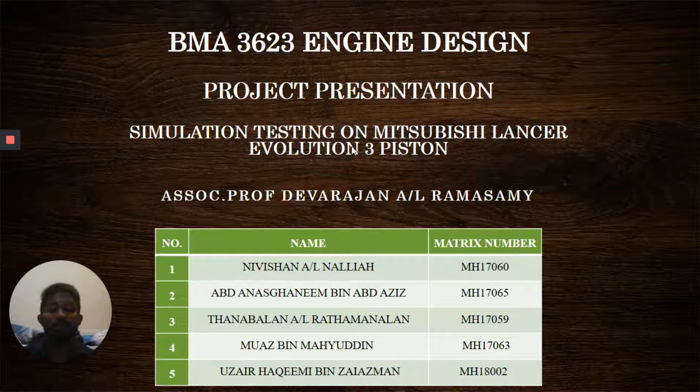Today I will explain to you all about the introduction of our project. Our project is a simulation testing on Mitsubishi Lancer Evolution 3 piston. In the introduction there are four subtopics: the first is the model of vehicle, Mitsubishi Lancer Evolution 3, or more commonly known as Evo 3; next is the engine type, 4G63T; next is the introduction about the piston; and lastly the objective of our project.

Now let us discuss the first subtopic, the model of the vehicle, Mitsubishi Lancer Evolution 3, or Evo 3. Evo 3 production was from 1995 to 1996. This car can produce around 201 kilowatts of power at 6,250 rpm and around 309 Newton meters of torque at 3,000 rpm. This car is all-wheel drive, powered by a turbocharged engine, with power transferred to the wheels using a 5-speed manual transmission. The maximum speed is 180 km per hour.

Now I will explain some detailed specifications about the chassis. Body type is a 4 or 5-seater sedan saloon with 4 doors. Wheelbase of the vehicle is 2510 mm. Tread front is 1465 mm, tread rear is 1470 mm.

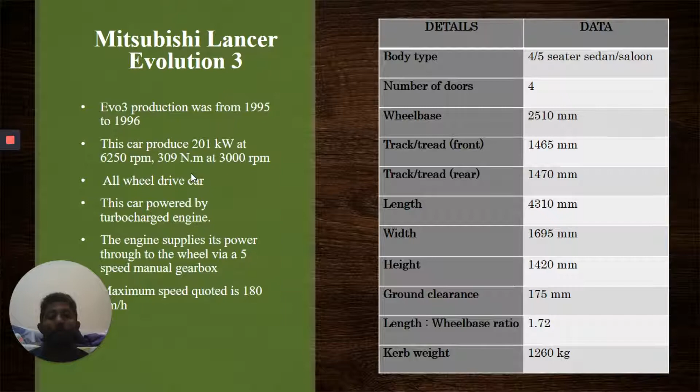Now let us move to the second subtopic, the engine type, 4G63T, first introduced in the 1980 Lancer EX2000 turbo car. This engine was manufactured with single overhead cam and dual overhead cam versions, but Evo 3 used a dual overhead cam. It was also manufactured with a naturally aspirated or turbocharging system, but Evo 3 used a turbocharging system. This engine was used in the Evolution generations from generation 1 to generation 9, and has been proven for its reliability and extraordinary power output.

Now I will explain some engine specifications. Bore of the engine is 85 mm, stroke is 88 mm, rod length is 150 mm, and piston pin size is 22 mm.

Total combustion chamber volume is 62.8 cc. Each cylinder volume is 499.4 cc. Compression ratio of the engine is 8.5:1. Crankshaft radius is 44 mm. The connecting rod type is I-beam.

The engine classification is inline, type of fuel is gasoline, number of strokes is 4-stroke engine, type of ignition is spark plug ignition, number of pistons is 4, motion of the piston is reciprocating, and the breathing type is forced induction.

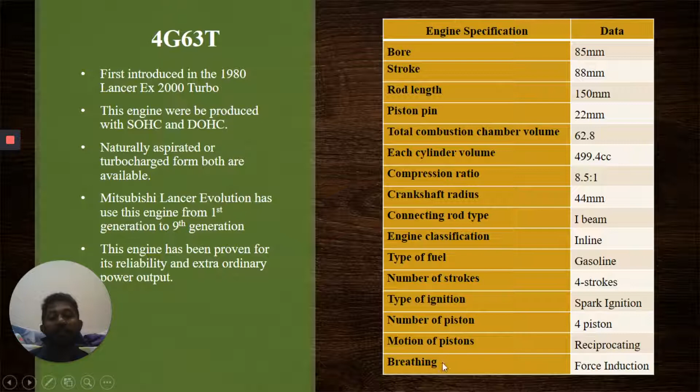Now let us discuss the third subtopic, the introduction about the piston. The piston is commonly a part used to transfer combustion energy to the connecting rod. The piston is commonly made of cast aluminum alloy because, as we know, aluminum alloy is a material with high thermal resistance and is very durable. Next is the piston features.

In a piston there is a piston head, piston pin bore, piston pin, skirt, ring groove, ring land, and lastly the piston ring. This is what we call the piston head, this is the piston pin hole, and this area is called the piston skirt. This is the oil ring, and these two grooves are used for the compression rings. This small hole is an oil drain hole to control the lubrication for the piston.

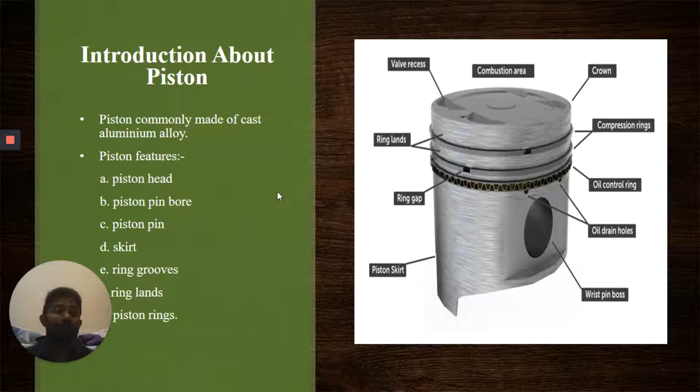Now let us discuss the last subtopic of the introduction, the objective. The objective of our project is to study the characteristics of the Evo piston, and next is to study the basic parameters to design a piston, because as we know, several parameters must be considered when designing a piston.

About for our group. So the introduction is: in designing any component, there are two major principles in designing, that is optimization of the product and the safety of the product.

So the primary objective in the design of this piston is to convert, not this piston but any piston, is to convert from chemical energy to useful mechanical energy. And secondly, it is to dissipate heat from the combustion chamber. So by having these two objectives, we have to carefully select our material so that it will dissipate heat better and also can withstand the operating pressure of the engine.

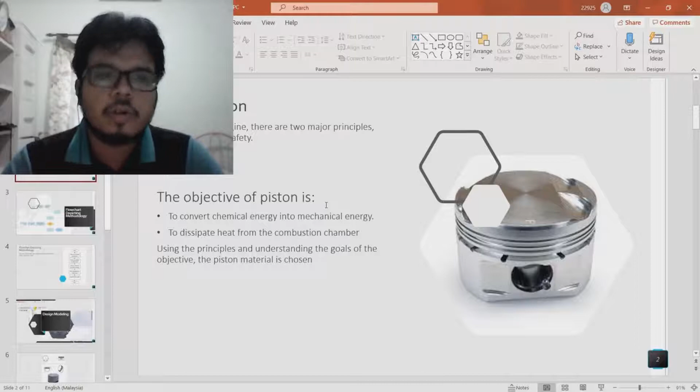So the main objective, so flowchart depicting methodology. So for this study, the objective of this study is to acquire the characteristics of the piston under static condition. The overall study flowchart is as the figure beside me.

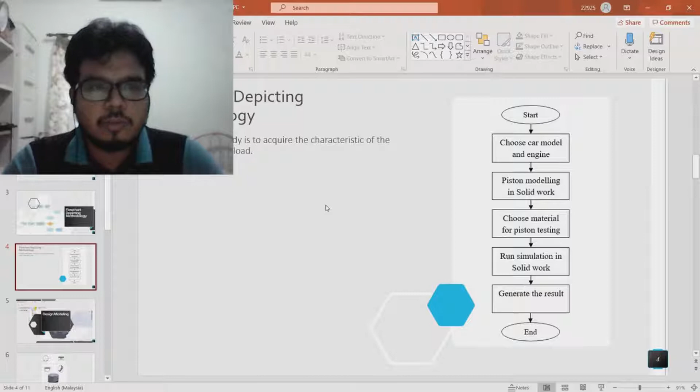So firstly, we choose the car model and engine. Then we take the measurement of the piston and then start drawing in SolidWorks. Then we choose the material for testing the piston. In this case, we compare between two materials, and then we use SolidWorks simulation to make a finite element analysis. Then we will generate the result, and after generating the result, we will conclude the result.

So for design modeling, we use SolidWorks because the workflow is simple. So we are able to 3D model the piston based on the measurement given. So the main criterion for this piston is to have a high strength so that the piston won't crack during operation.

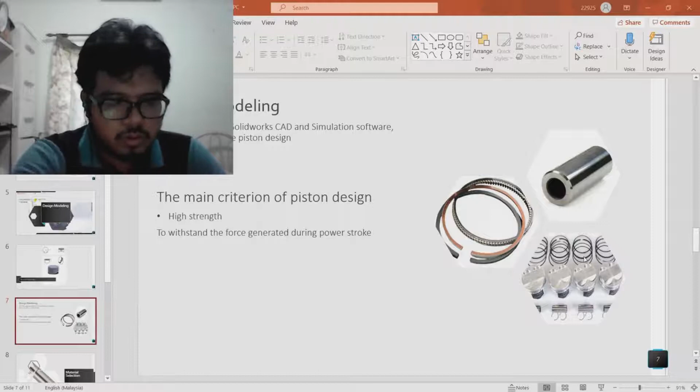Okay, for the material selection, originally the 4G63T inside of the Mitsubishi Evolution 3, the piston was cast iron, but because we want to know the piston characteristics and compare between two piston materials in maximum bending moment, we search for another material. There are two candidates: first is aluminium, the second is medium carbon steel.

For the aluminium, based on the criterion that has been put in the slide, aluminium is good in strength, but compared to steel it is a bit expensive. So we choose steel because it has good strength with good machinability and it has medium carbon content.

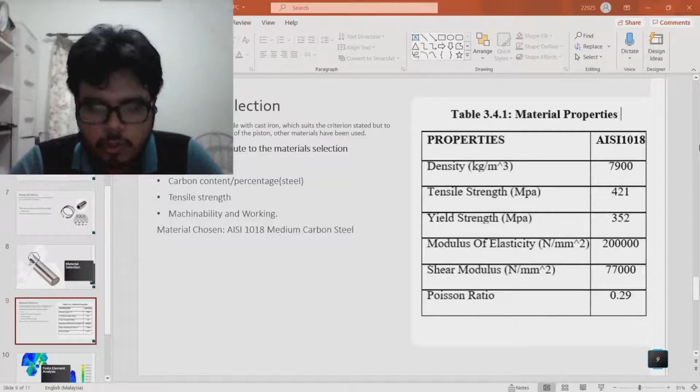Okay, next is finite element analysis. The software that we use is SolidWorks simulation. Since we have done the model in SolidWorks, it will be easy to use its simulation product so that we don't have to interchange between two computer aided design environments or finite element environments. So for finite element analysis, it is used to simulate forces near to the real world condition, operating near to its real operating force.

So how the model works is the object will be transformed into an element node matrix. So each element and each node has its own force value. From the total node element matrix, the software will generate a mesh which consists of those nodes and elements.

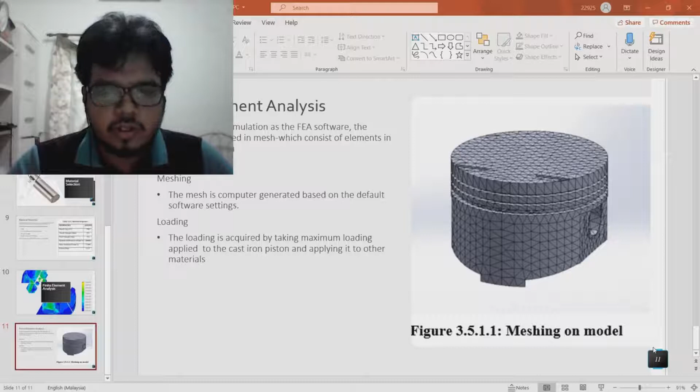And to conclude about this, with the final slide presented, I end my presentation here, and I will pass the baton to my friends. Thank you.

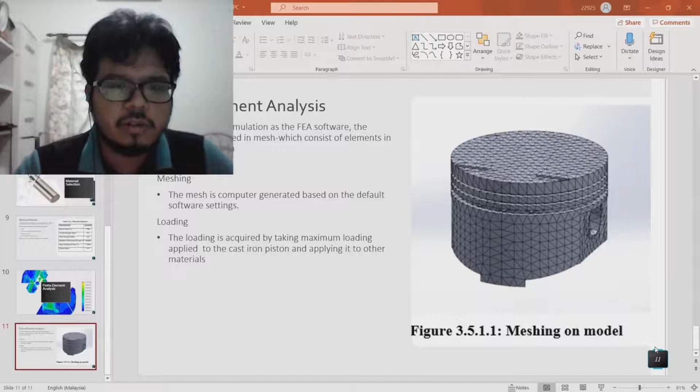Today, I would like to... My name is Tanabalan, MH17059. I would like to discuss the results, which is crank angle degree versus piston position.

This is a four-stroke engine, so it requires 720 degrees to finish one complete burn. Each stroke requires 180 degrees, where the piston moves from TDC to BDC, then BDC to TDC back. At 0 degrees the piston is at TDC, then at 180 degrees the piston is at BDC. So here you can see the piston position where the distance is variable. That's what this graph is showing.

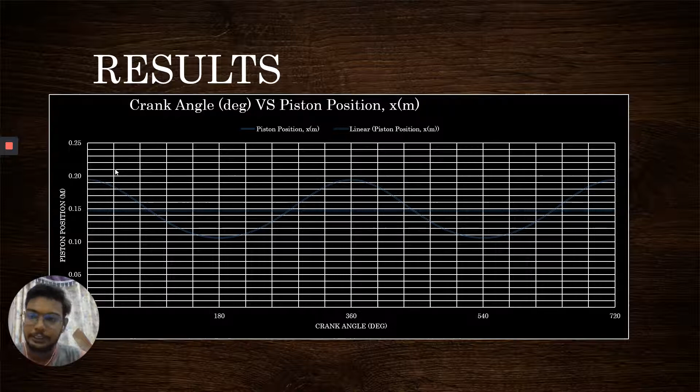Next, crank angle versus piston velocity. This shows, by changing the crank angle, what the piston velocity will be at each crank angle.

So here you can see at 180 degrees the piston changes direction, usually going from BDC to TDC. So at that point the piston position doesn't move, it stalls, because it's changing direction from going down to going upward. So at 180 degrees, the velocity is zero. Then as it goes toward 90 degrees, the piston speed is negative, then positive, because of the changes in crank angle, the piston velocity is also changing.

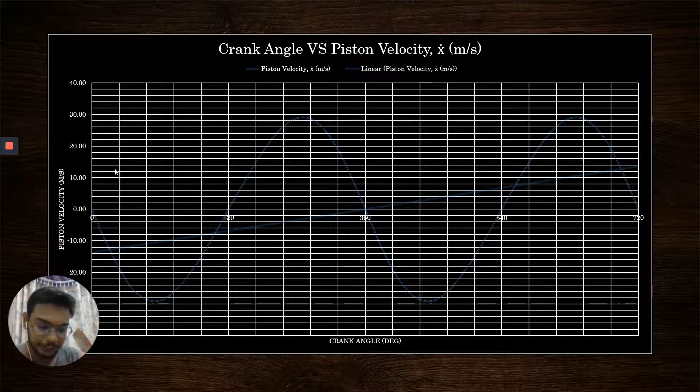Next, crank angle versus piston acceleration. This shows the piston acceleration, how fast it's moving.

From 0 to around 150-160 degrees, not quite 180, it's at the peak speed. Then it's considered that there is no acceleration, the speed is constant, then it changes back. So why does this happen?

Because the piston is not moving, this is called the crank end float. There will be an end float there where the piston will not be moving, but the crank itself will be moving a few degrees. That's the reason why this straight line occurs two times - because of the four strokes, two revolutions, 360 degrees once and another 360 degrees once, totaling 720 degrees. That's what this graph is showing.

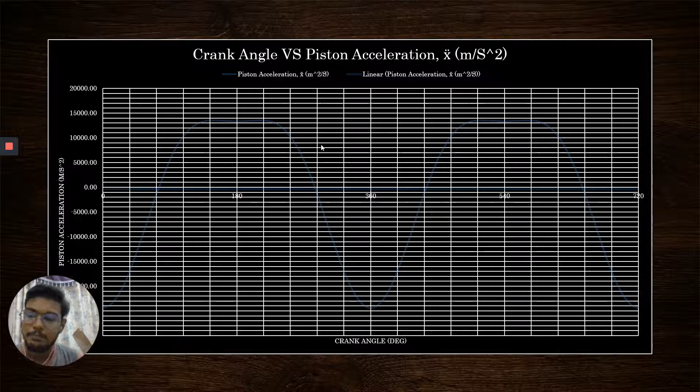Next, this is the kinematic analysis. This is basically just the calculation of average piston speed, which is 18.33 meters per second, clearance volume of one piston, instantaneous piston speed, piston position, distance from TDC, instantaneous volume, angular velocity of the connecting rod, and furthermore, just the basic calculations.

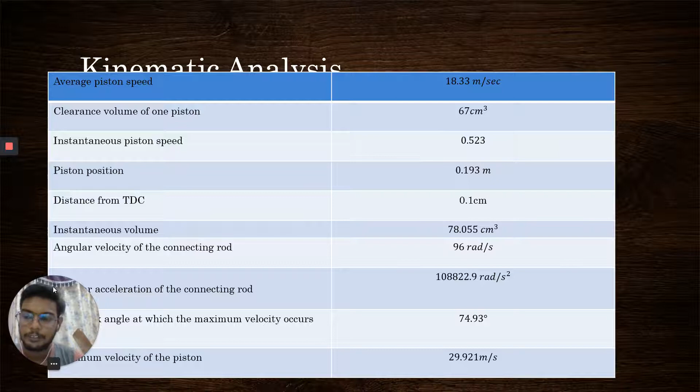Just the basic ones: the angular acceleration of the connecting rod, the crank angle at which maximum velocity occurs, and the maximum velocity of the piston - what the maximum speed of the piston will be. So that's what we calculated here, and these are the results for all of these questions. This is what we researched for kinematic analysis.

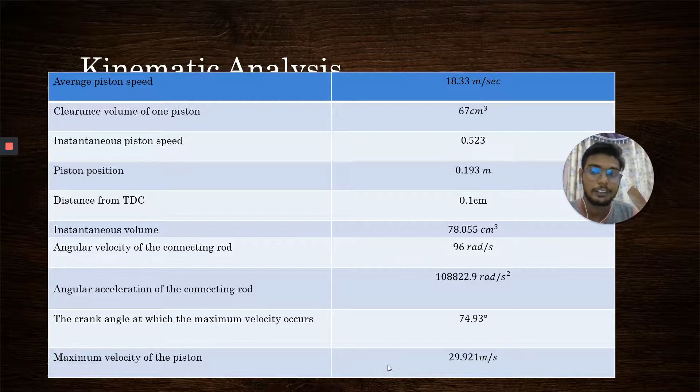Next, theoretical calculation for piston design. The number of working strokes per minute, where it is 3,125 RPM.

Then the maximum cylinder gas pressure - the maximum pressure which this piston can hold - is 5.8976 Newton per millimeter square.

Then cross-sectional area of the cylinder, indicated power, thickness of the piston head on the basis of heat dissipation, the heat flowing through the piston head, the maximum side thrust on the cylinder due to gas pressure, maximum load on the piston due to gas pressure or maximum gas load, and maximum bending moment at the center of the pin. So these are the answers we get for all these questions.

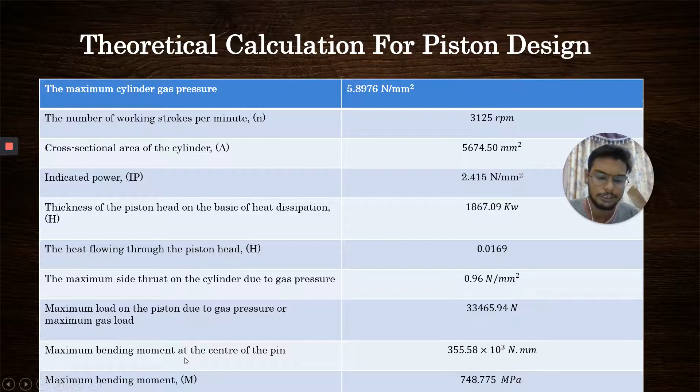Then simulation results of cast iron pistons.

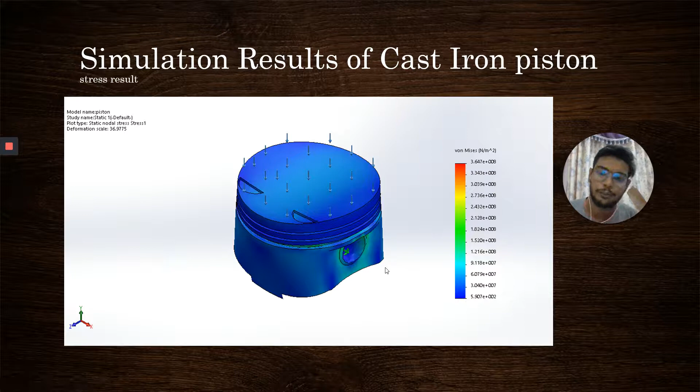So this is the stress simulation. By the photo here, after doing the simulation, you can see the highest stress part is here, where it's a bit greenish. It's very stressed at the pin, where the pressure from the combustion chamber is high during combustion. This pressure is equally distributed to two areas: one here, and the opposite area, the piston pin area. That's why it takes very high stress here. So when designing the piston, that place will have a lot of metal there.

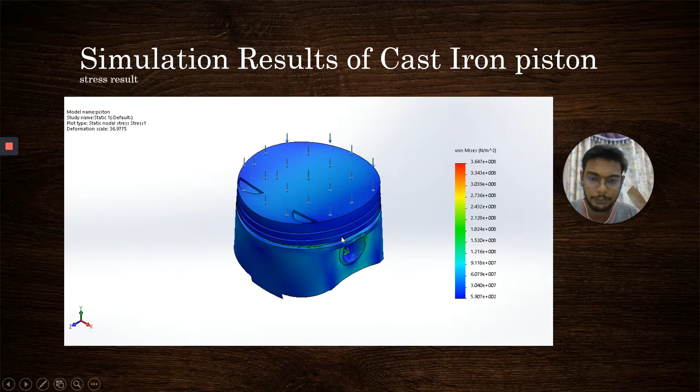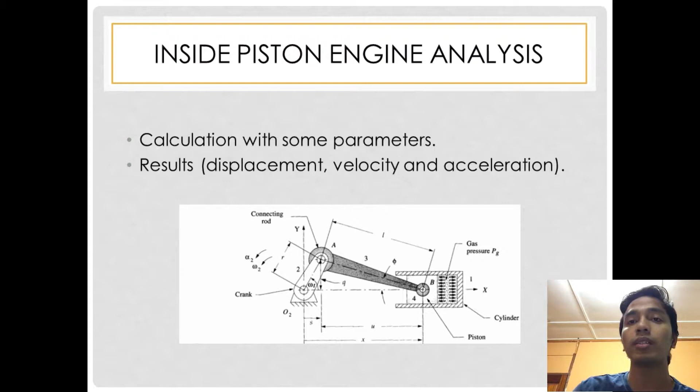Then the next discussion is we make a kinematic analysis. Firstly, we collect information, then we run some tests. At the end, we get results such as bore, stroke, connecting rod length, displacement volume, and others.

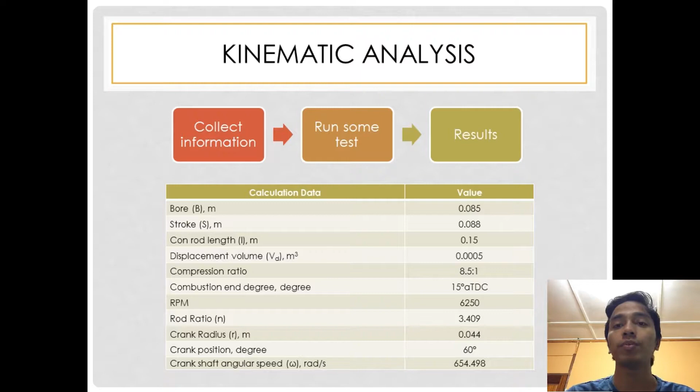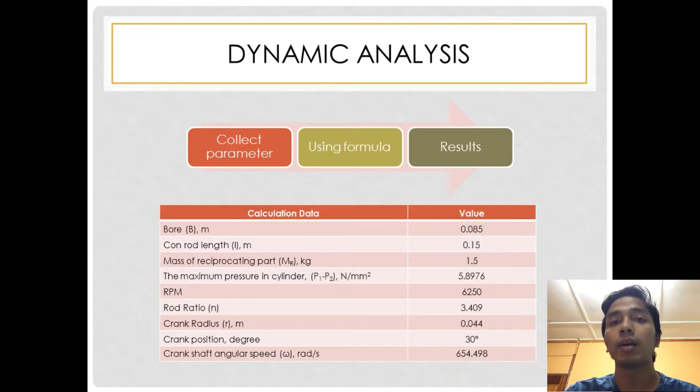So next, we go to dynamic analysis. Firstly, we collect some parameters and assume some parameters. Using formulas, we make calculations and then we get results, such as bore, connecting rod length, mass of reciprocating parts, the maximum pressure in the cylinder, and others.

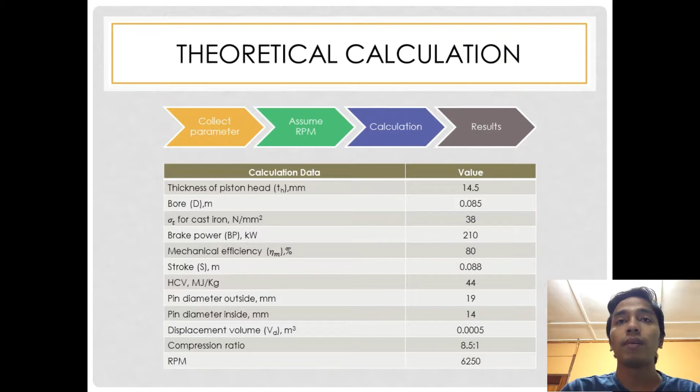There are 3 main objectives in this report: first, to study the characteristics of the Evo 3 piston; second, to study the basic parameters to design a piston; and third, to study the characteristics of the piston when using different materials. After the aspects we took in this analysis, most of the answers are very relevant and satisfactory in the calculation. In terms of simulation, it showed some positivity.

So there is a little review about the Evo 3 engine. Its engine was boosted to 270 horsepower at a slightly higher revolution, thanks to a new turbine, higher compression ratio, and reduced exhaust back pressure.